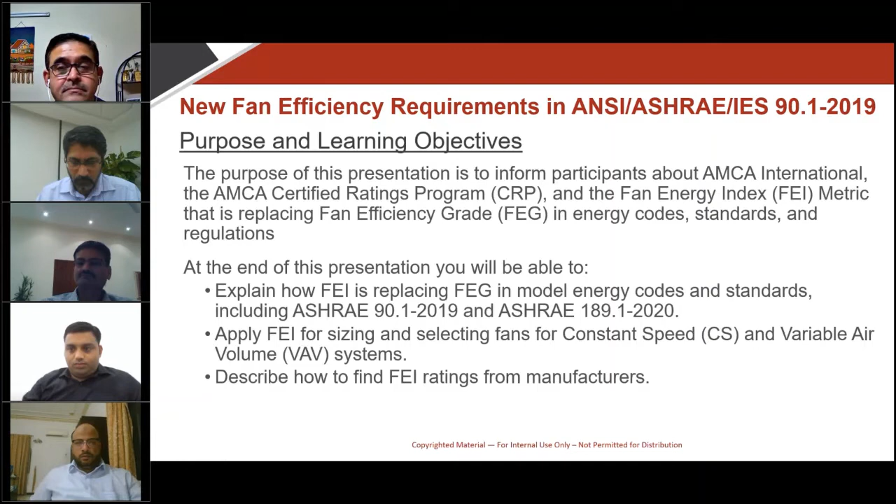Our purpose and objectives today are to inform you about AMCA International, the Certified Ratings Program, and the new Fan Energy Index metric, and how it's replacing FEG in some energy codes and standards. At the end of this presentation, you should be able to explain FEI and how it's replacing FEG in these standards, how to apply FEI for sizing and selection of fans, and describe how FEI ratings can be obtained from fan manufacturers.

By way of outline, I will cover the FEI basics. Again, my name is Tim. Michael Ivanovich will cover the remaining topics: how FEI is used in ASHRAE 90.1 and 189.1, how to specify certified FEI ratings, what FEI means in both constant volume and variable volume systems, and he'll give you some other resources on FEI.

Starting with the basics, first of all, why the change? The 2016 version of ASHRAE 90.1 includes a requirement for a minimum FEG value for fans. When the US Department of Energy started the process of regulating fan efficiency, this metric, FEG, was quickly removed from their consideration. Since FEG was not a wire-to-air metric, it didn't incentivize the use of direct drives or more efficient motors. Also, for a peak efficiency metric like FEG to actually save energy, a requirement was needed to apply fans within a certain percentage of their peak efficiency.

While ASHRAE 90.1 included such a requirement, the US Department of Energy can't technically dictate how a product is applied. So the Fan Energy Index was developed to address these shortcomings, and has now replaced the FEG requirement in the 2019 version of ASHRAE 90.1.

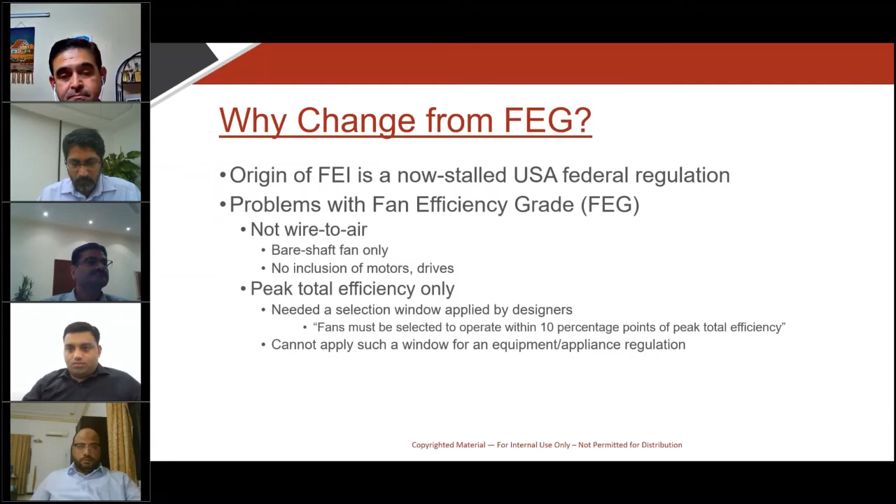Some of the issues addressed with this new metric: FEI is a wire-to-air metric, so credit is given for improvements to the efficiency of the fan, the transmission, or the motor speed control. Instead of a peak total efficiency metric, FEI reflects the power consumed at any potential operating point, and it's based on either static or total efficiency, as is appropriate to the fan type.

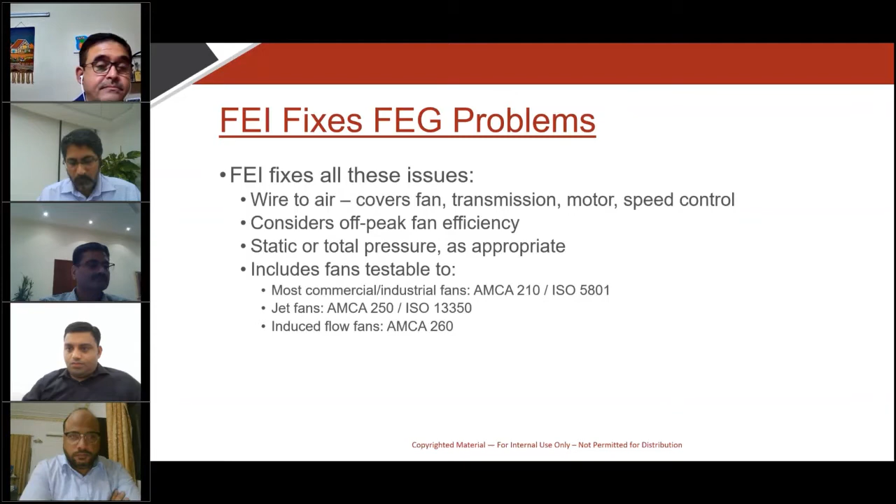Some of the benefits you'll hopefully see as I go through this presentation: the clarity of this wire-to-air metric allows instant identification of compliance, and the flexibility of how FEI is used as a fan selection tool, comparing various types, sizes, and drive configurations for a given duty point. Because of this, you can quickly move on to other fan selection criteria like budget, cost, and acoustics. The simplicity of this metric directly reflects power consumed by various fans, and all these benefits will result in greater energy savings, which is why AMCA developed this metric for eventual use in fan regulation, and why ASHRAE 90.1 has also adopted its use.

Fans can produce a wide range of airflow and pressure, but each individual combination of airflow and pressure is referred to as a duty point. So the output of a fan is airflow and pressure, and each of these points is a duty point.

You could talk about specific duty points, like the design duty point, the as-installed duty point, or the peak efficiency duty point. But for now, let's just use the term fan duty point to refer to a specific airflow and pressure within the fan's total operating range.

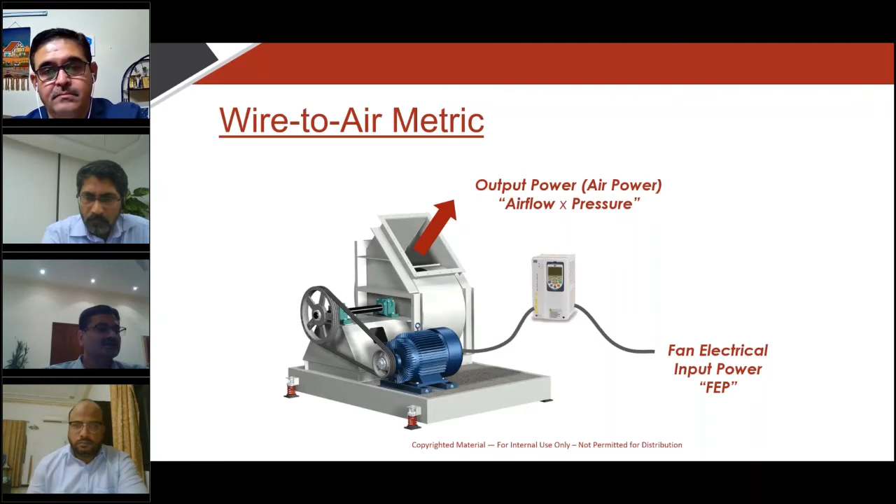Fan energy index, as defined in AMCA 208, is the ratio of a reference fan electrical input power to the actual fan electrical input power. It's a wire-to-air metric, electrical input power. Both the top and bottom of this ratio are calculated at the same output power, the same fan duty point, or airflow and pressure. So FEI becomes a relative measure of the power required for a given duty point, relative to the reference fan electrical power.

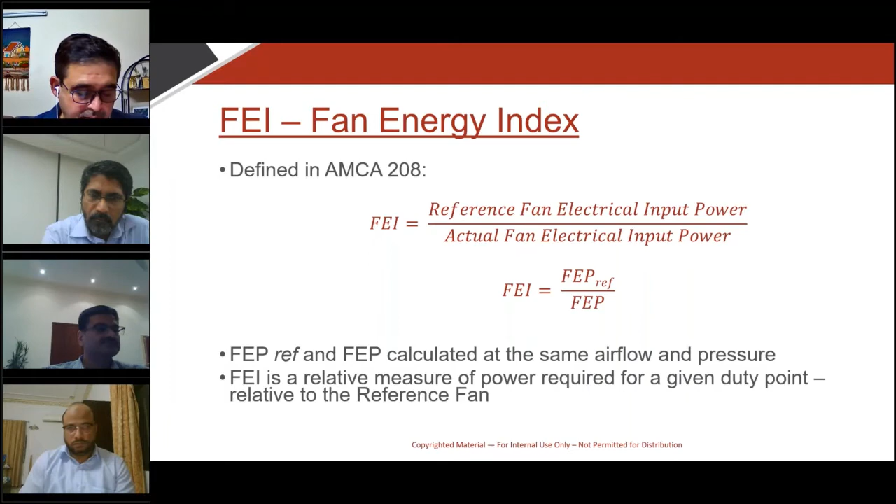People often ask, what is this reference fan, and who decided to make it a reference fan? Well, it's a reasonably efficient fan. And who decided that? It was established by the fan industry working with the U.S. Department of Energy, and the reference fan efficiency is fully documented in AMCA Standard 208.

At the heart of this reference fan is an empirical function of fan efficiency versus airflow and pressure. This graph shows the concept. I'm showing here lines of constant efficiency. So the reference fan has to have this efficiency. Very large, high pressure fans are required to be very efficient.

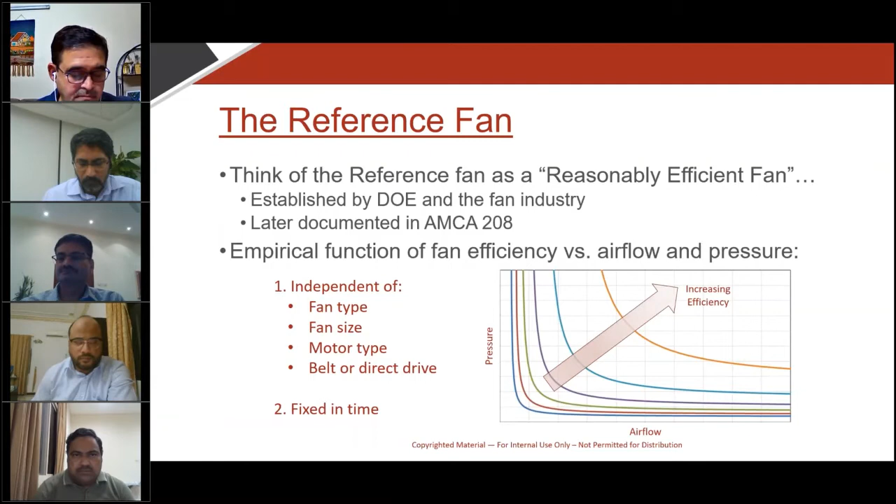As the pressure is reduced, this reference fan efficiency is relaxed—think about prop fans in that case. As airflow is reduced, think about small fans, moving to the left on this curve, the reference fan efficiency is also reduced. The important concept is the reference fan efficiency only depends on airflow and pressure. We've kept it independent of fan type or size, motor type, motor size, whether it's belt or direct driven—only depends on airflow and pressure. Because of that, any combination of fan type, size, belt, or direct drive can be compared with respect to each other.

Now, fan selection is an important part of FEI. As most people know, fan efficiency is very dependent on where the fan is operating on the fan curve, and most fans are selected to provide a specific airflow and pressure at a design duty point.

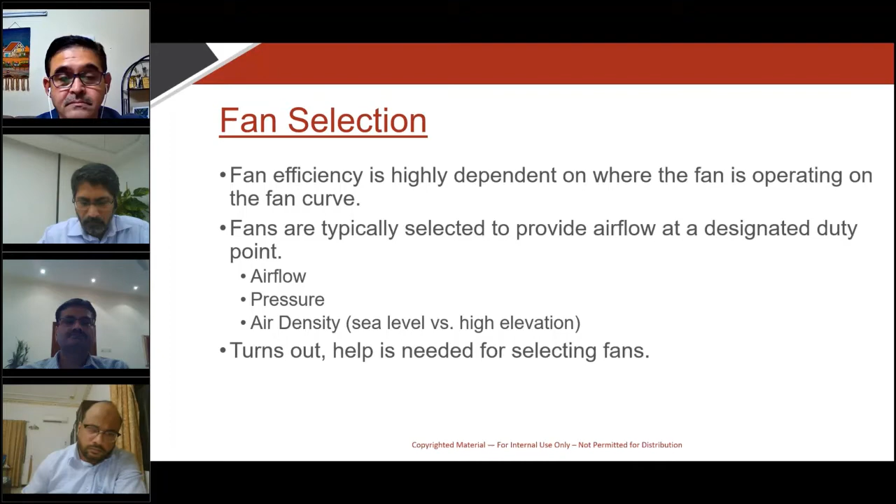It turns out help is needed. When we were developing this metric, we looked at typical fan selections. Here's actual fan selections for a single fan size—a square inline fan from one manufacturer over a period of a year. There are almost 300 fan selections. You can see the various speeds the fan is available at, and lines of constant efficiency drawn here. This fan is not particularly efficient; it has a peak efficiency of 53%.

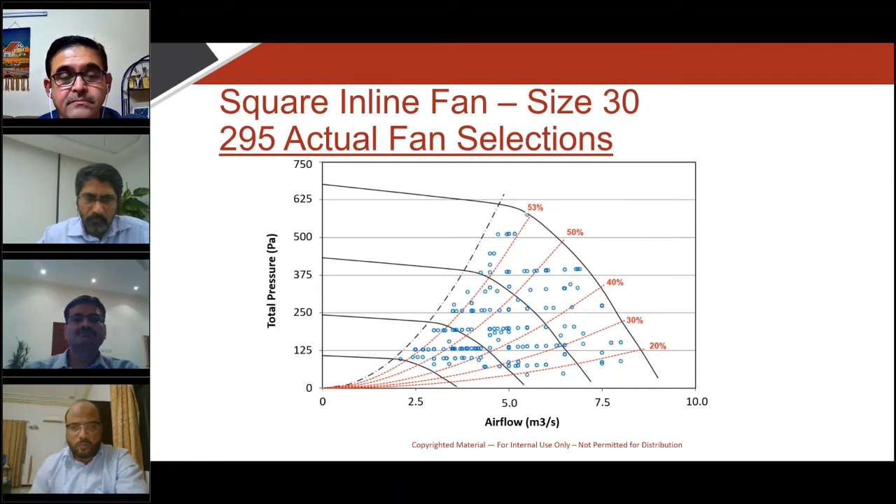But as you look at these blue dots, you can see that either fan efficiency is not a priority for people selecting these fans, or they simply didn't know what the efficiency was when they were making the fan selections. We found this behavior to be very typical across most fan types.

When we look at FEI on a fan curve, a fan doesn't have a single value of FEI—it has a different value of FEI for each duty point within its range of operation. This fan I'm showing at a single speed has a pressure curve here. We can also plot an FEI curve versus airflow at that single speed, and the curve will always look something like this: rising up to some peak value near its peak efficiency, then dropping off toward free air.

When we establish some minimum required FEI for compliance, in this case shown at 1.0, we can effectively define a range of compliant performance on the fan curve, shown here in the red portion of the pressure curve.

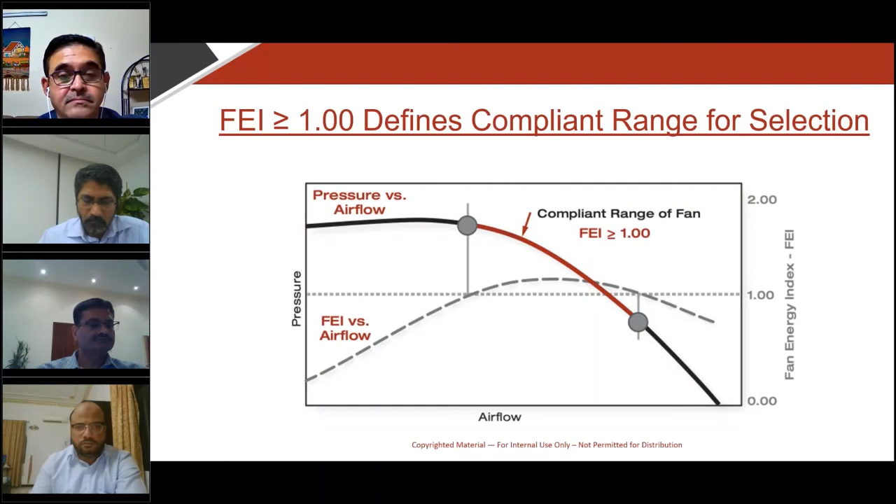Now, most fans are offered over a range of fan speeds. If you're a seasoned engineer with experience selecting fans from a paper catalog, you're going to appreciate the next few curves. But if you're a young engineer and haven't seen many of these, try to learn something from this and use it to help your understanding of FEI.

Multi-speed fan curves like this are generated for the purpose of making fan selections. They can be fairly complex, but also useful. Start with a series of fan pressure curves at various fan speeds. This fan is available from 400 up to 1600 RPM. Usually a surge line will be added with some advice not to make selections to the left of this curve.

So if we want to make a fan selection on this curve at design airflow and pressure, we can go into the curve and plot that point, and we can tell immediately that yes, this duty point is within the fan's operating range. We can tell it needs to run just under 1200 RPM, and that design point is quite a ways away from the surge line, so we shouldn't get ourselves into trouble with surge.

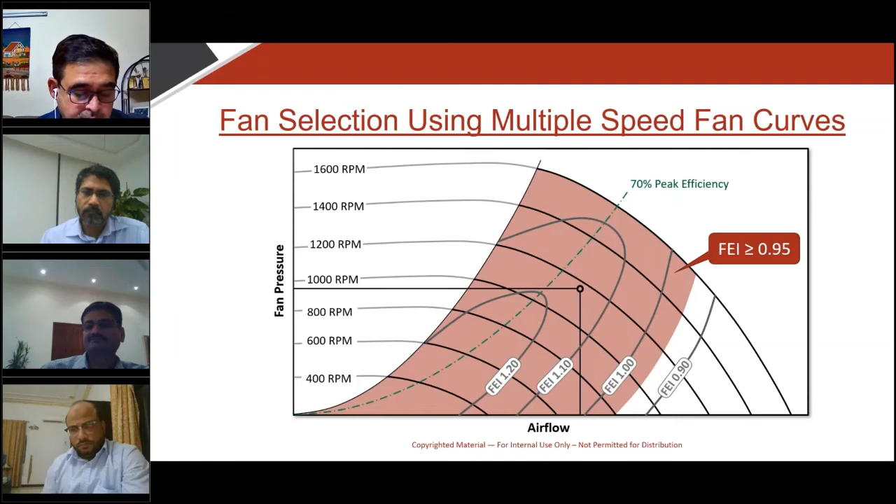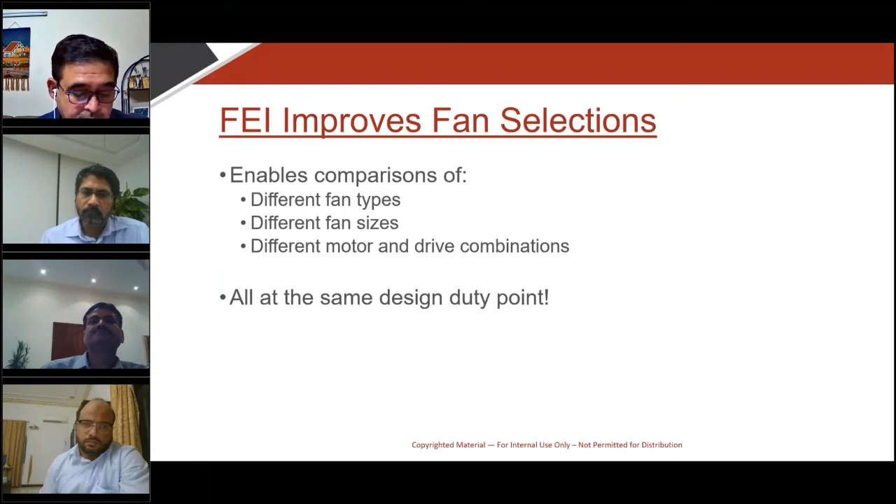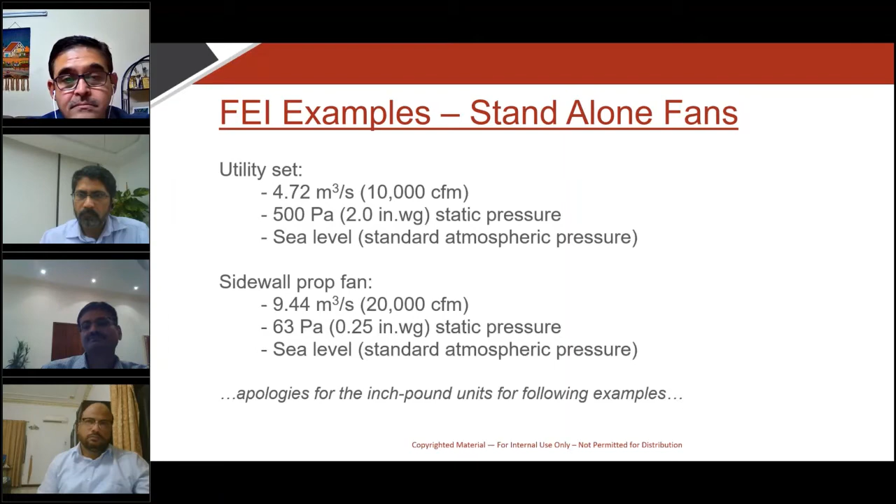Okay, so examples of how to use FEI in selecting some different fan types. I've got two examples here, a utility set and a sidewall prop fan. A utility set designed for 4.7 cubic meters per second at 500 pascals of static pressure, and a sidewall prop fan, which is higher airflow, 9.4 cubic meters per second, at a lower pressure, 63 pascals. You're going to see some pictures here of fan selection software, and they are in inch-pound units, so I apologize for that. Here's the utility set, 4.7 cubic meters per second at 500 pascals.

For this design duty point, we can see there are 8 fan sizes that are able to do this requirement, from size 200 up through a size 402, and they're sorted in that way in this selection software.

We can look at the operating power right in the middle of the page, brake horsepower, and you can see it ranges by a factor of over 2. We've got some very low power fans at the bottom of the screen, and then it goes up to some very high values. So what I want you to notice is you'll see fan manufacturers with FEI printed here, and this is very similar, nearly a factor of 2, reflecting the actual power consumed.

So you can tell immediately from this selection screen, if our requirement was FEI of 1.0, the smallest 2 fans would not be suitable. And you can see also from the power they consume why they wouldn't be suitable.

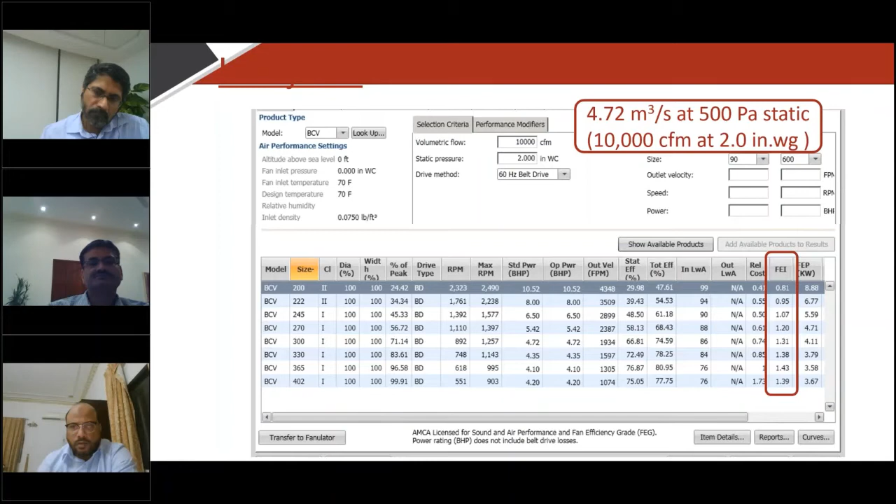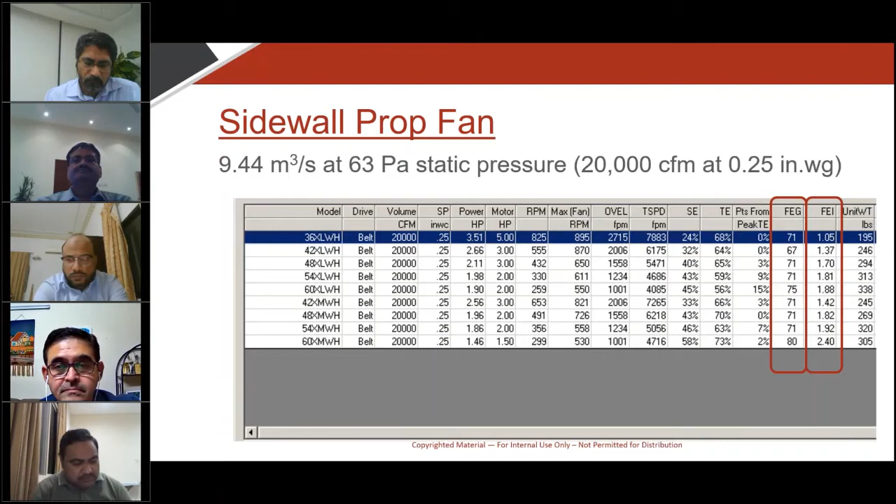But immediately with the FEI, we've got an index here that is directly related to the power consumed. So we've got this factor of about 2.5 from the worst to the best. Now, in this case, all of the fans available for this duty meet an FEI requirement of 1.0 or greater.

The next example I want to show: if let's say those didn't all meet that requirement, and we said, well, what are the ways to meet the FEI requirement? Well, one of the ways, as has become obvious, is to use a larger fan. Typically, a larger fan will reduce the power consumption.

But in this illustration, I've actually made the selection at half of this airflow and said, well, what if none of my selections were okay, and I couldn't use a large fan—couldn't use a fan that was 2 meters in diameter. How could I do that with a smaller fan? Well, I could cut the airflow in half, and while it says the same airflow up here, I've actually cut it in half for this selection.

Now you can see the FEI for the smallest fan. Let me go back one screen. Our smallest fan here at 20,000 CFM was an FEI of 1.05. If that didn't meet our FEI requirement, I could cut the airflow in half for each fan, and with half the airflow through this fan, I've got an FEI of 1.7, much higher.

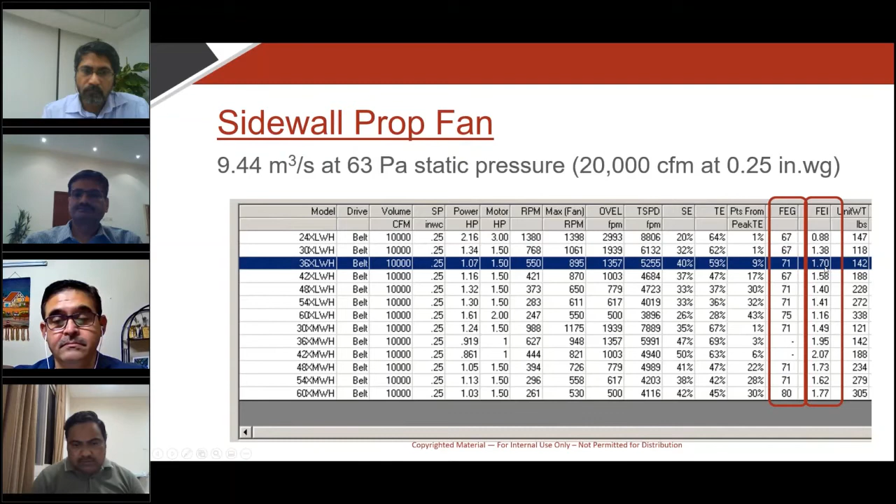And you can see that's reflected by the power. This fan, at half the airflow, requires 1.07 horsepower. The previous fan at half the airflow required 3.5—so more than three times, well over twice the power of the fan with the lower airflow. So that's a technique as well. But you can very quickly, from the FEI values here, show which fans consume the least power and which fans consume the most.

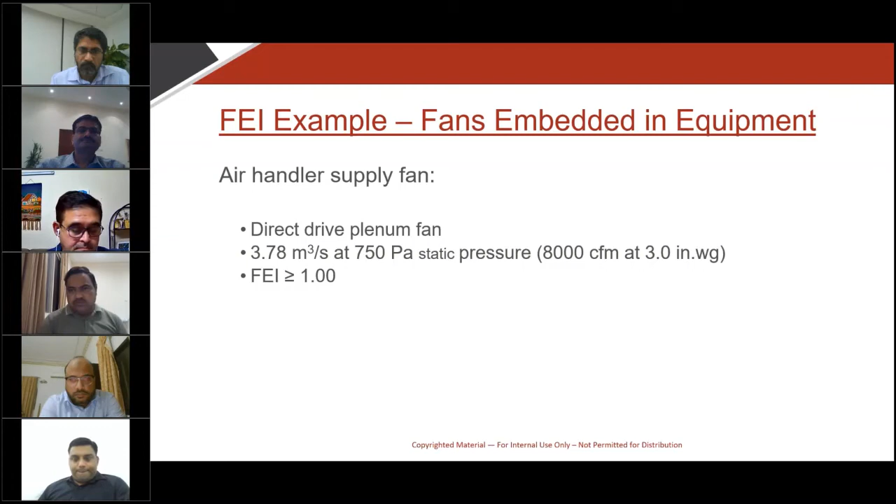I've got some examples of fans embedded in equipment as well, an air handler supply fan and an air handler return fan. With an air handler supply fan, you're typically not going to have any trouble meeting FEI requirements of 1.0, but oftentimes the return fan is at a lower pressure, so you'll be lower on the fan curve, and sometimes it can be more difficult to match an FEI requirement.

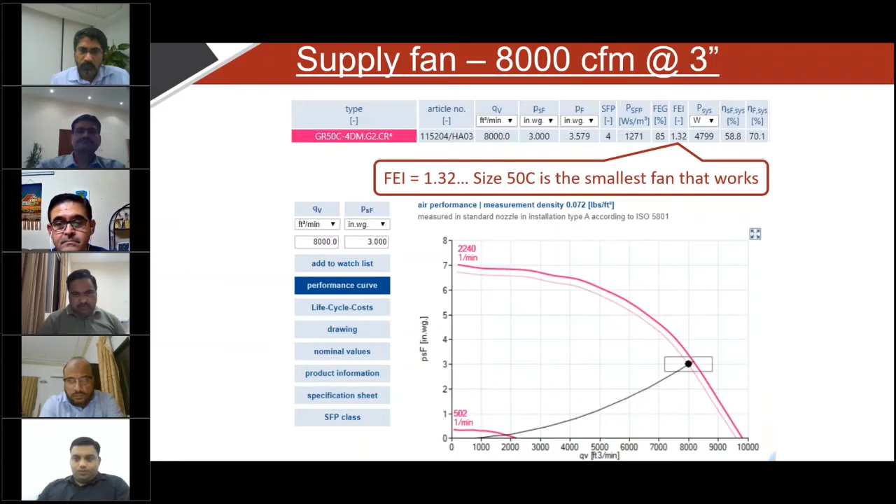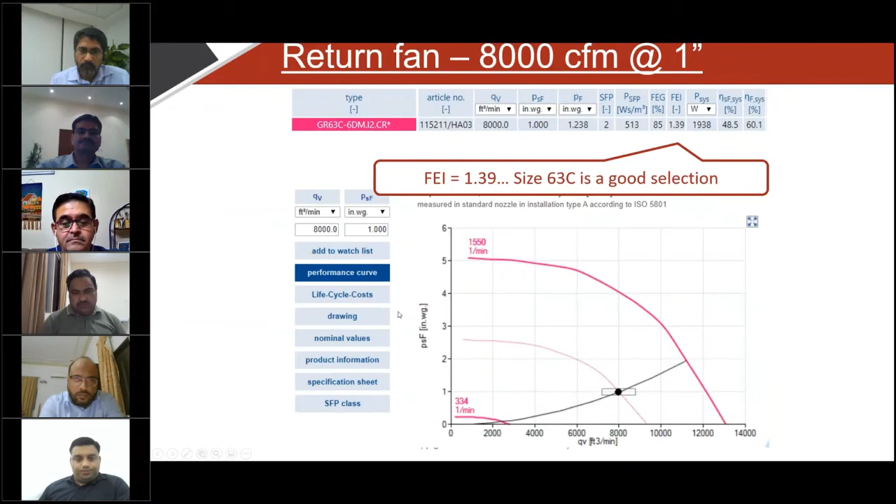I'm not going to go through each one, but here are some screens you might see—I've made 3 selections for the supply fan, and then the return fan is at a lower pressure, 250 pascals, and I looked at 3 selections for the return fan as well. Here's a summary of the previous slides, so I've skipped right to the summary. For the supply fan, there were 3 sizes available: size 50, 56, and 63.

We show here the electrical input power in kW for each of those fans was fairly similar, and the FEI value for each was well above 1.

For the return fan, it's a little more difficult because you're lower on a fan curve. You can see a greater range in power consumed and a greater range in the FEI. In this case, the size 50 did not meet the 1.0 minimum FEI requirement. That is typical of what you will see in selecting fans in embedded equipment.

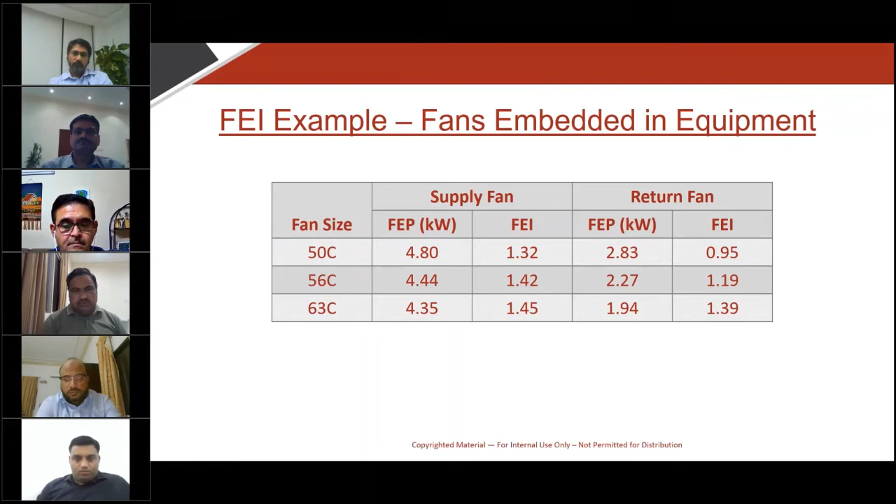Okay, so back to this screen that I showed before. This is just a summary. Hopefully you can see the benefits of this new metric FEI in its clarity, in its flexibility, and its simplicity, and hopefully that'll result in greater energy savings.

We designed this metric for regulators, for regulation of fans, but the real winners, I think, with this metric are going to be the design engineers who are selecting fans, who will get to know this metric FEI, and who will really like its versatility and like how they can specify energy savings with the use of this metric.

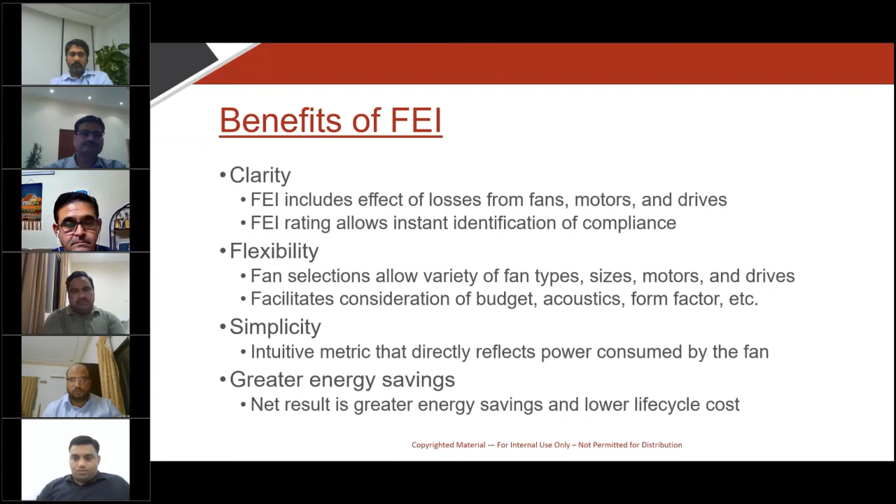Okay, so Michael will join us now to talk about how this FEI metric is being used in codes, standards, and regulations.

All right, thank you, Tim. Let me see if I can just grab the screen here. All right, someone gonna send me the screen? There we go, I think. Hold on one second. All right, Tim, can someone send me the screen? Let's see. Okay. I don't have, can you guys see my screen? There we go. Not yet, I'm trying to do it. I'm here. There you go. All right. Yeah, no, it's fine. So let me start my presentation.

Thank you very much. I'd like to thank everybody for having Tim and I speak today. FEI can seem kind of complex, that's why we go into it with some detail. Tim did a fantastic job, he's a great teacher. I'm going to show you how FEI is represented in codes, standards, and regulations.

And it's actually from that perspective, from your perspective of being engineers having to comply with an energy standard, it's actually pretty simple in many cases.

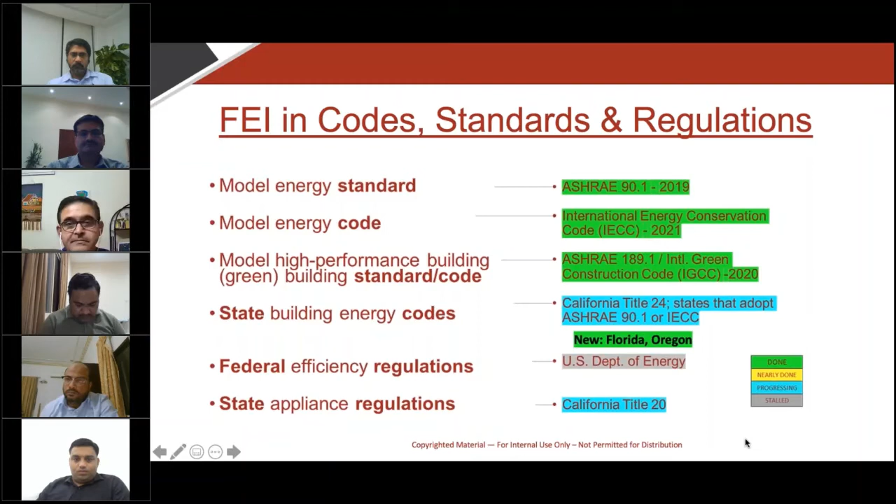It's actually easier to use FEI in an energy code or energy standard, but for a product regulation it's kind of tricky. California, working with AMCA and our members, has got that figured out now. Once it's final, we expect other states to use FEI for product regulations, but also other countries. So that's why it's relevant to this audience.

Continuing, we're going to focus on what's in 90.1 and pretty much also in IECC, but this is an ASHRAE audience, so we'll call it 90.1. In the language of 90.1 2019, FEI has to be greater than or equal to 1.00, but if it's a VAV system, FEI can be as low as 0.95. They do that to give credit for the fact that you might have a VFD on a fan running at full load, so the VFD has an energy efficiency penalty at full load.

So we kind of gave credit there. We didn't want that to hurt any fan selections, and so we brought it down to 0.95 for VAV systems.

It's important to note that FEI is calculated at fan system design conditions. Fan system design conditions are what the engineer would specify as the point at which you're going to select the fan - this is the duty point, the airflow, pressure, and density at which you want the fan selected. It might be at 100% flow for the hottest day of the year, or it might be a fan you operate 90% of the time. It's up to you to define what the fan system design condition is for selecting your fan, and that's where FEI is calculated.

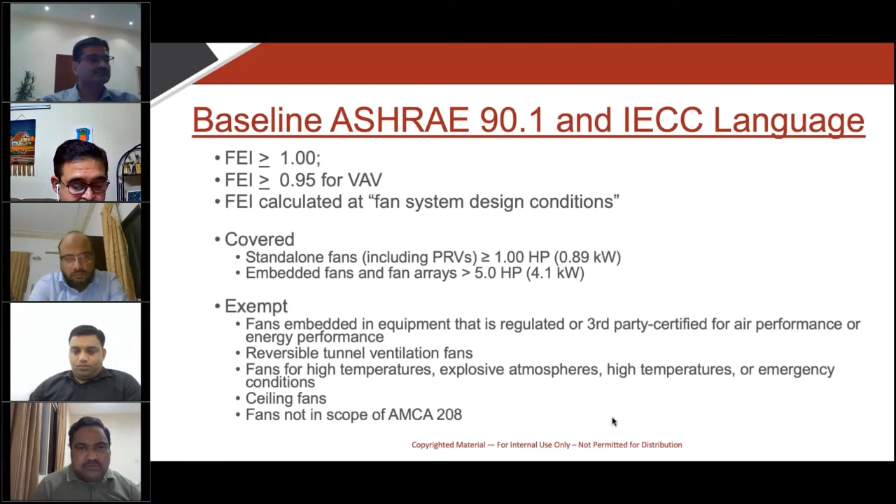As Tim mentioned, he showed you these bubbles. Just going to blow that up a little bit and show that anything in the shaded region up to 1.00 is the FEI requirement for constant speed fans. Go a little bit outside it, and between 1.00 and 0.90 is the FEI greater than or equal to 0.95 requirement for VAV systems. So this is showing the compliant bubbles for 0.95 and 1.00.

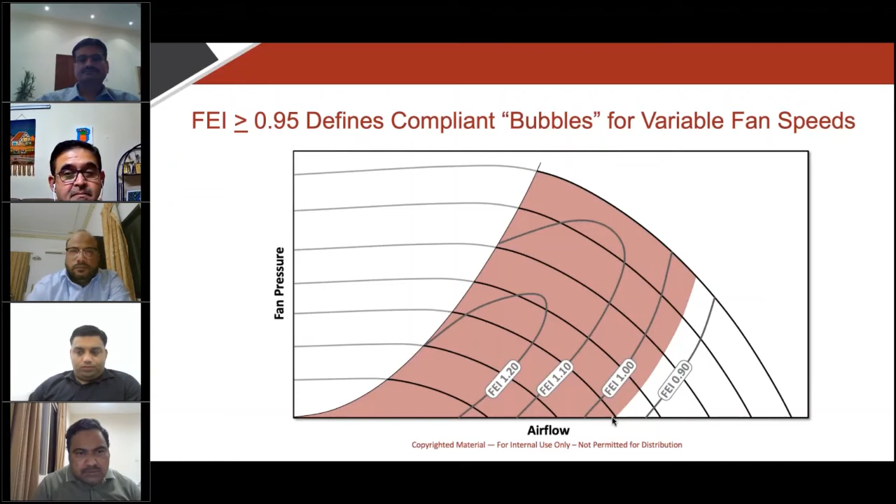In terms of what's in ASHRAE 189.1 2020, its FEI has to be greater than or equal to 1.10, so it's a slightly higher FEI requirement. There's no changes to what the exemptions are from baseline—whatever's exempt in 90.1 is also exempt from 189.1. There's nothing new added, and there's no removal of exemptions.

Also worth noting, the level does not change for constant or variable speed fans. So if you've got a VAV system, it has to meet 1.10. If you have a constant speed system, it also has to meet 1.10 if you adopt 189.1 for your design energy standard.

Also worth mentioning, if this were the IECC, the International Energy Conservation Code, you'd have to have certified FEI ratings—fans with FEI ratings calculated by an independent third-party laboratory, such as the AMCA Certified Ratings Program. That is not required for ASHRAE.

Personally, we do advise that you specify AMCA certified FEI ratings, because internal to the software, the FEI ratings have to take into account fans that are sold with motors and drives. Those drives could be belt drives or electronic drives. The fans could also be sold without a motor and drive—we call those bare shaft fans. So there's all these options for how fans are sold. The motor could be regulated or unregulated by the U.S. Department of Energy, and that factors into the FEI calculation.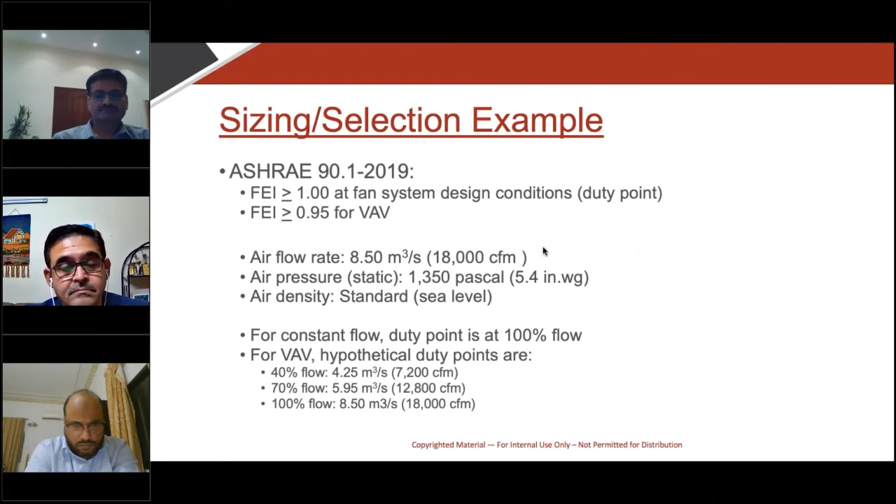For constant flow, the duty point used to select the fan is at 100% flow. For VAV, I created 3 hypothetical flows to show you how FEI behaves at 3 different flow rates: 4.25 cubic meters per second, 5.95 cubic meters per second, and 8.5 cubic meters per second.

So first, looking at constant flow, where FEI has to be greater than or equal to 1.00, the hypothetical manufacturer software gives me 2 different fan types. As mentioned, you can compare against fan types, not just different sizes of the same model. You've got fans ranging in size of the airfoil double width from 464 millimeters up to 686, with FEIs at 100% flow ranging from 0.90 up to 1.23.

It drops a little bit at the largest size—you know, it's kind of physics. I don't really understand that, but it's not uncommon. Tim could probably explain it because he's an expert in fan engineering.

And then the other fan type is backward incline, also a double width, and it's going to range in similar sizes from 464 up to 686 as well. Its FEI is going to range from 0.82 up to 1.17.

So the first question you ask is, which of these fans are compliant with ASHRAE 90.1? The answer is, I shaded out the non-compliant fans in yellow, so anything below 1.00 is non-compliant. That leaves you free to select any of these fans for compliant fan selection, and I'll talk a bit more about what's the best fan given these options.

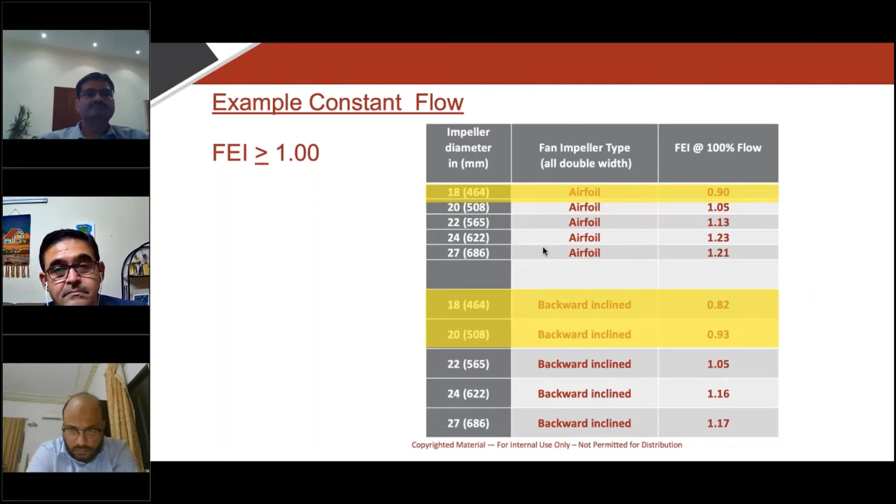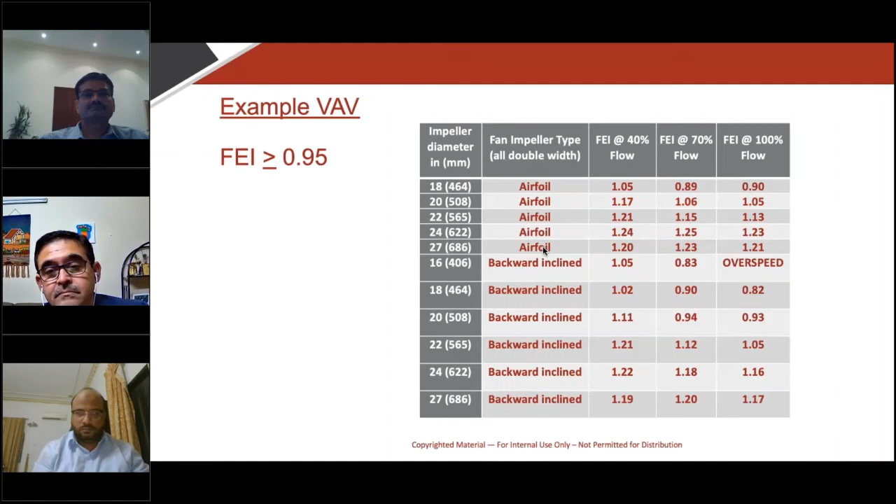Looking at VAV, similar situation. You've got 2 different fan types that are going to come out from the manufacturer's software: airfoil and backward incline, both double width. You've got 3 different flows: 40%, 70%, and 100%.

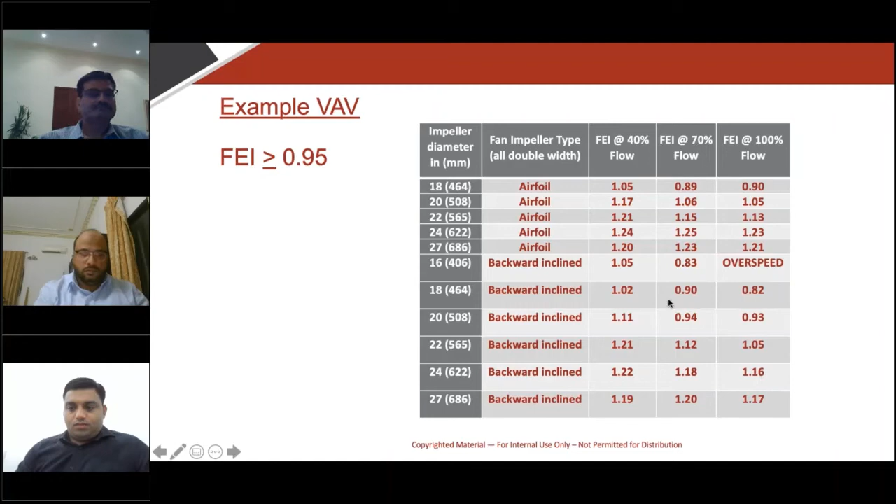The thing I wanted to call your attention to is that, first of all, the requirement is now 0.95. The behavior of FEI is at 100% flow, it's kind of your lowest FEI rating. As you slow the fan down for lower flows, the FEI level is going to go up.

But quickly, just eradicating the non-compliant fans, you've got the ones that are less than 0.95 now covered up. You've got one case with the 16-inch backward incline - it's an overspeed condition. You don't want to select that fan at all.

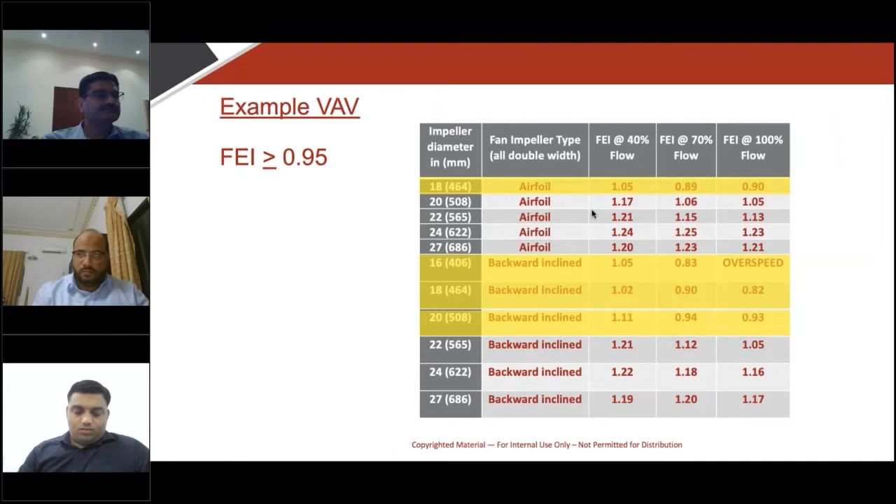But notice now for the airfoil, you range from 1.05 up to 1.23 again, but notice how the FEI increases at the lower fan speeds. Now, you probably still want to use 100% flow for your fan system design condition, but you don't have to. If you did, you'd be confident knowing that your fan would be running at higher FEIs at the lower flow rates.

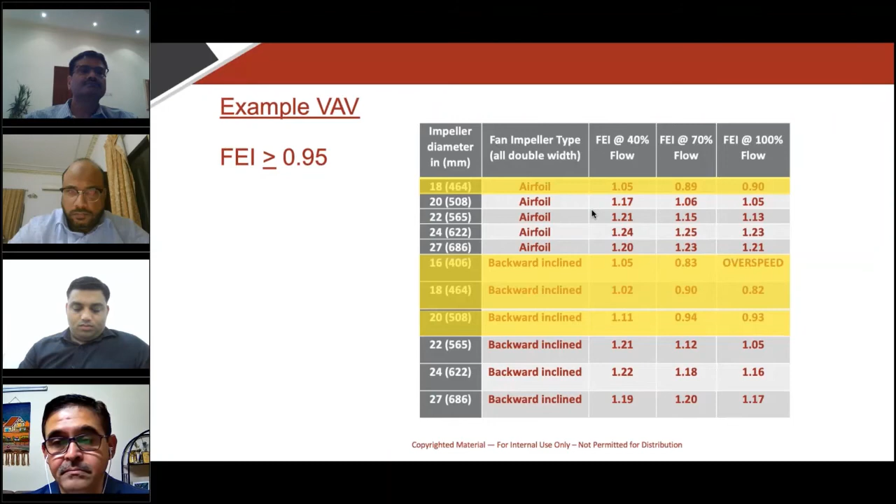So what does this all translate into? It means guidance for VAV systems, which is what we were asked a lot and why we developed these slides, is that slowing a fan's rotational speed generally increases its FEI rating. The best duty point for VAV might be the hottest day of the year, needing 100% airflow. So select a fan to have an acceptable FEI rating at 100% airflow, and this will ensure compliance at loads below 100% airflow.

Now, careful reading of 90.1 means you don't have to be compliant at your lower flow rates. The requirement is that you're compliant at fan system design conditions, but it's just kind of nice to know that when you select it for that design condition, the FEI will increase.

Now, if you select the fan at 1.00 at its 90% flow, because that's where it's going to run all the time, and you have to run it up to 100% flow, your FEI level might decrease and be non-compliant at 100% flow, but that's okay. As long as you're compliant at the fan system design condition, you're compliant with 90.1.

Other guidance is that if the fan meets the FEI requirement at peak condition, the fan will likely meet the FEI requirement at lower flow conditions. I'm being repetitive because repetition builds retention.

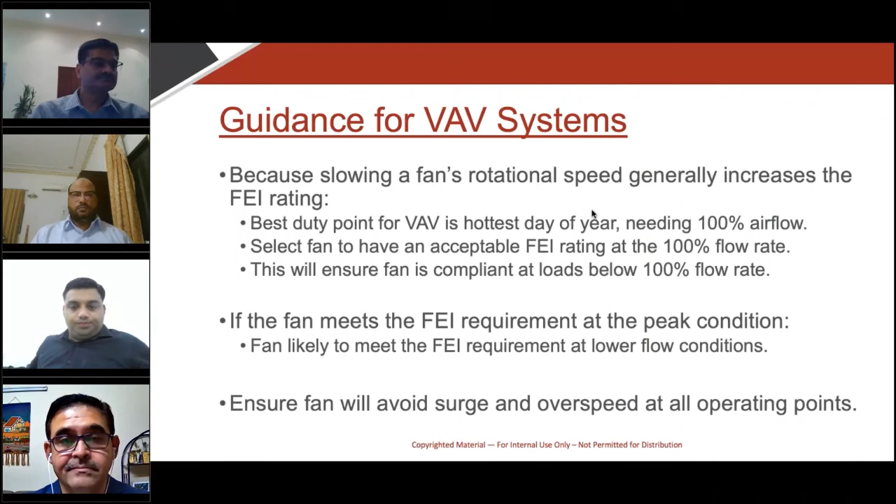And then you also need to know that you have to avoid surge and overspeed at all operating points. You don't deliberately choose a fan that's going to run in the surge region or at overspeed. So that's just general guidance for anyone picking fans.

So giving those 4 or 5 options for the different fan types, what's the best fan? Basically that's up to you. Once you're compliant with the energy requirement, you're free to consider the other things that go into selecting a fan.

Form factor, the shape of the fan and size, its weight, what's your budget, what's the energy cost, so that you might go up to those higher efficiency fans. They'll cost more, they might be bigger, but your energy penalty is far reduced, greatly reduced. You're running a lot less energy, so your energy cost savings will be much higher, and it could pay for those extra size or that extra weight fairly quickly.

Generally, it does - the energy costs for the larger fans, the cost savings generally pay for themselves within several years. And then the acoustics, also very, very important, and of course availability. If you can't get the fan you want when you need it, you have to pick a different fan. So just letting you know that once you're compliant, as engineers, you're free to use your engineering to select the best fan.